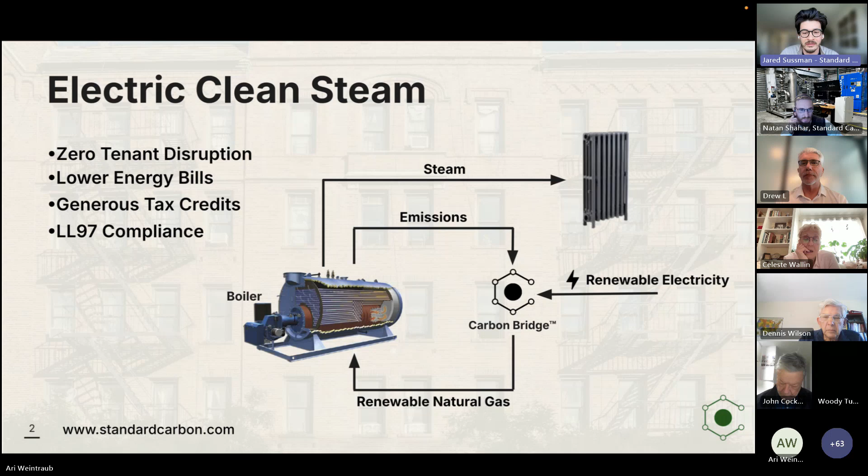An easy way to think about that is that it's similar to how houses with solar can sell electricity back to the power company on a sunny day. You can see this is a totally closed loop system with our only input really being grid electricity. This allows you to use your existing steam system and comply with Local Law 97 with no tenant disruption. Next slide, please, Ari.

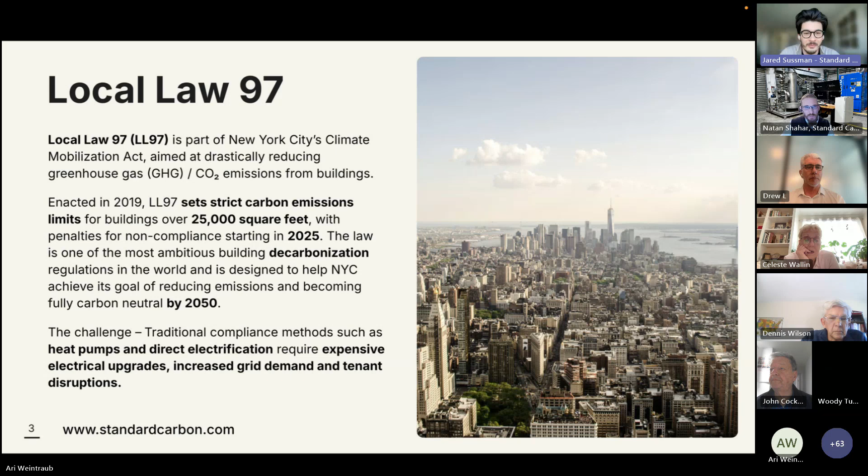I know you're all familiar with Local Law 97 at some level. The end goal is for New York City to become decarbonized, meaning fully carbon neutral by 2050. This is really not that far in the future, considering the amount of work that needs to be done to get there. Our take on this challenge is, how do we get this done with minimal tenant disruption? So what can we do about this enormous challenge in front of us? Next slide, please.

I'm going to introduce our founder, Natan, to answer that question. Hi, thank you. My name is Natan. I am a New York licensed professional engineer. I've been working in the energy efficiency space now for more than 15 years, providing LL87 compliance, NYSERDA rebates, now LL97 compliance, a whole host of work for the real estate sector in New York City in particular.

I started Standard Carbon in 2019 when the law was first passed, Local Law 97, because a lot of my clients came to me and they said, what do we do about 97? And I said to them at the time, well, if they really do go through with this law, you should sell your buildings. That's what you should do, because it's going to be so difficult potentially to retrofit and electrify your boiler plants and everything else that you might want to just exit the market entirely.

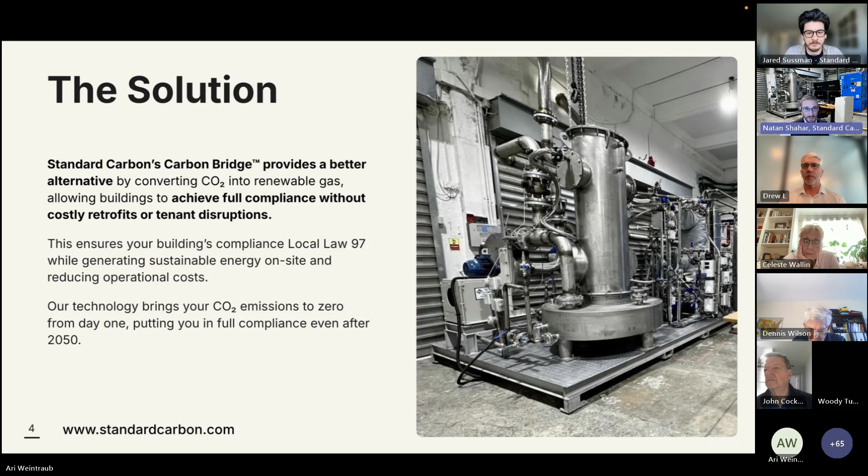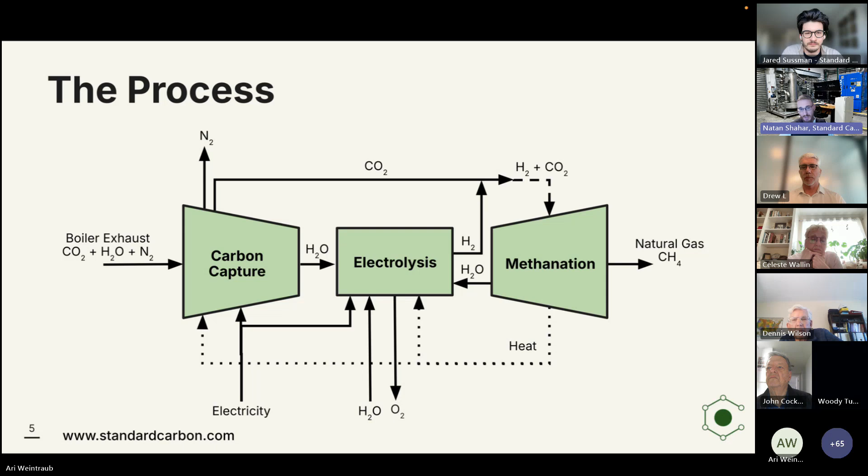Only this natural gas, instead of being fossil fuels, it's produced from that carbon dioxide and intermittent renewable electricity, which you see entering sort of the magic box, so to speak, from the bottom. That's in a nutshell what we do, and it offers a solution for electrification that we're very excited about. So next slide.

Thank you, Natan, by the way. Let's move on and cover some of the key benefits of the Carbon Bridge system. We already said a few times that our system causes no tenant disruption. What we really mean by this is that all the work is done in the common areas and practically doesn't even touch your existing steam system.

Something I've personally heard a lot in speaking with numerous building owners is the challenge, like Natan mentioned, with not having too much space to work with in their basements or on their roofs. Like he said, we've designed this Carbon Bridge system to be flexible and enables us to fit into practically any space, as well as work with buildings of any size, small and large.

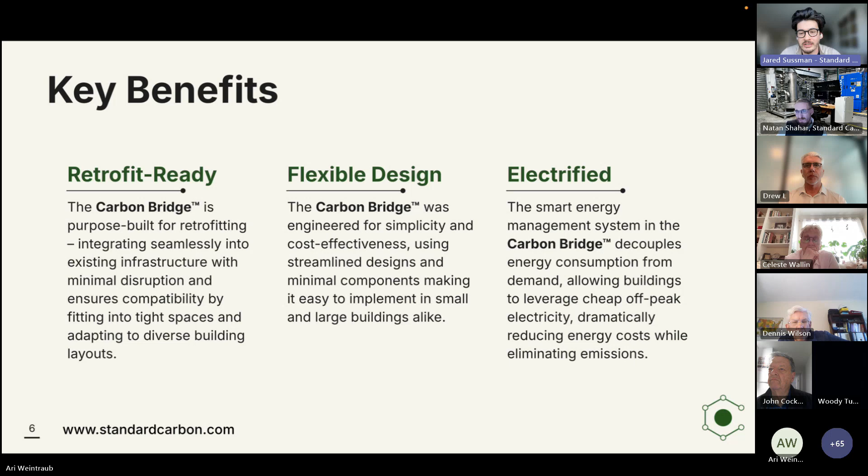The last one on here, we'll dig into this a bit more on one of the next slides, but because we use off-peak electricity to power our system, buildings can see significant energy cost savings since they no longer need to be at the mercy of peak demand charges. Next slide, please.

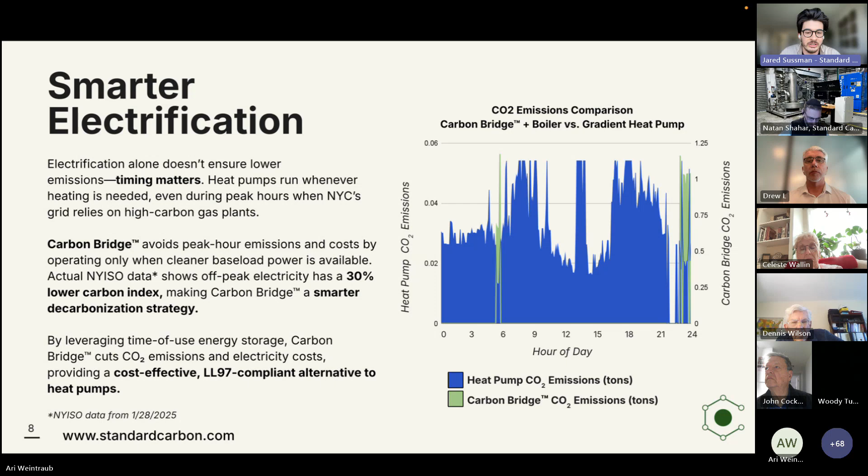Okay, so let's talk numbers. Take a typical 50,000 square foot building in New York City. If it exceeds LL97 limits, it could face $250,000 in annual fines. This is a rough estimate based on typical emissions data for older, mid to large commercial buildings in New York City. Carbon Bridge eliminates those fines, and by converting emissions into renewable energy, it also offsets the utility expenses.

This makes it a highly cost-effective solution with a typical payback period of just 5 to 7 years. Now, this 5 to 7 year payback period doesn't take into account the avoided penalties. Obviously, if you factor that in, it's even more financially attractive, and we see a payback period in this case of just under 3 years.

Next slide, please, Ari. On the subject of fines, I'd like to introduce our CEO, Drew, to talk about how we can help immediately. Thanks, Jared. Hi, everyone, and thank you for your time today. I feel this is such an important slide, I wanted to present this myself.

Being a member of condo boards for years, I know firsthand all the issues we all face, right? I see the rising costs, code compliance, regular maintenance, along with a host of other issues. And I, like you, feel the frustration while simultaneously realizing the importance of addressing this all. I coined this Local Law 97 derangement syndrome. And it is a reality for us all.

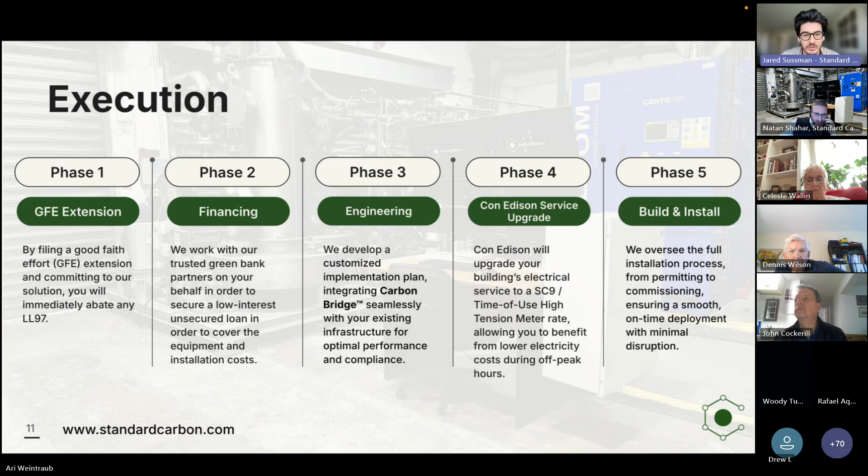When it comes to installation, we oversee the entire process from permitting to final commissioning. Our team ensures that everything runs smoothly and with minimal disruption to your daily operations.

Next slide, please, Ari. I just want to say again, thank you for joining us today. I hope the session gave you a clear understanding of how the Carbon Bridge can help you achieve Local Law 97 compliance while unlocking significant cost savings.

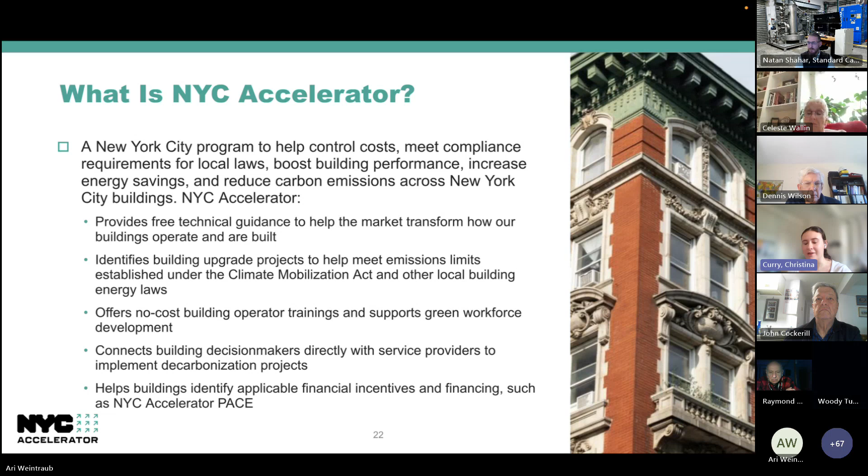So I'll be talking a little bit about what the Accelerator as a program can offer, and specifically Local Law 97 deadlines and extensions today. Next one. So the Accelerator is a program through the New York City Mayor's Office of Climate and Environmental Justice. We exist as a free technical guidance resource program to help walk you through local law compliance, any other building energy upgrades you'd like to make, connect you with incentives and service providers, and hold your hand through the process from beginning to end. And if financing is necessary, or you have a super that wants to get some sort of training, we also offer resources on that side as well.

And then the details of what buildings we're eligible to work with. We are able to work with any privately owned building over 5,000 square feet. So if you own smaller buildings that are not subject to Local Law 97, we can work with you as well if you're interested in making upgrades. Any building smaller than that, we refer to our partner organization, so you're not left in the dust. All you have to do to get connected is give us a call, and you'll get connected with an account manager like myself, and we give you objective advice tailored to your needs and goals for your building. And it's a completely free program, so there's no cost. You can talk to us as many or as few times as you'd like.

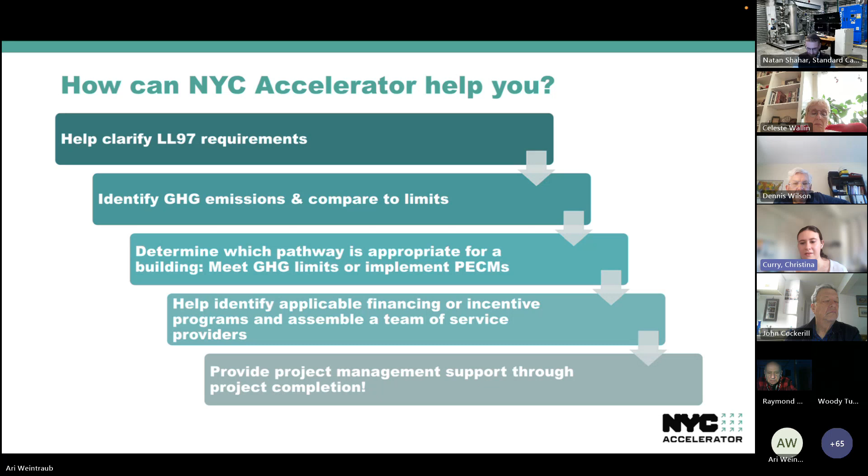And this is our regular process for a Local Law 97 covered building. We clarify what exactly the requirements are and what the law is expecting of your building specifically, identify what your emissions are based on Local Law 84 reports and compare them to the limits, and determine which pathway is appropriate for your building. I'll get a little more into what this means in a couple of slides, but then we help identify how exactly you can achieve those goals, and like I said, hold your hand through the process until the projects are completed.

Fun part. Okay, so Local Law 97 timeline. It was passed back in 2019, and now we are almost at the first compliance report deadline of May 1st, 2025. That's the big one there. Coming up very soon, as you can see, Article 321 and Article 320. That's affordable housing under certain criteria, as well as market rate multifamily, and commercial and industrial buildings. Every 5 years will be a new compliance period with a new threshold. So I'll explain that as well.

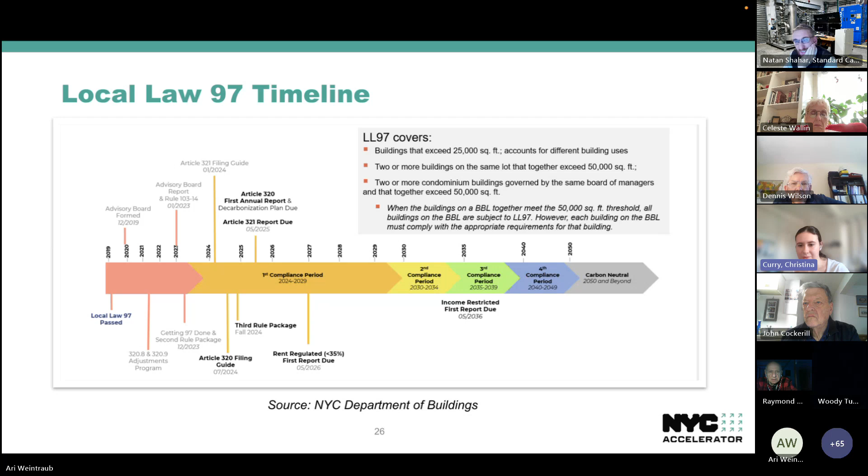So the overview, as I mentioned: Article 320 applies to market rate buildings and commercial industrial buildings over 25,000 square feet, and they will be required to meet these carbon reduction targets.

Every 5 years, this given threshold, based on the building use and building size, catered to each building, will drop based on these goals to eventually hit net zero by 2050, as was just discussed.

As things currently stand, 89% of properties are expected to meet the first compliance period limits, which is great. The big drop comes in 2030, when only 63% of properties are expected to meet those limits. So planning ahead is really key.

It's truly not that far off, so planning ahead is a great idea. A decarb plan, that kind of thing, is really a good idea at this point.

For Article 321, that refers to specific affordable housing buildings, again over 25,000 square feet. That has a different compliance option, which is a one-time report. So stay tuned if you fall under the Article 321 pathway specifically.

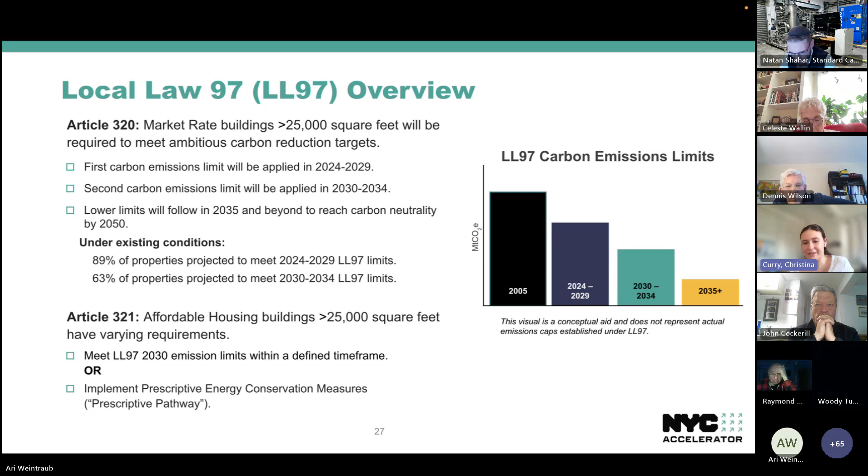With the GHG emissions compliance pathway, the Article 320 traditional way, the gross floor area is very important - that's what determines your limits in a lot of cases.

Starting in 2025, annually on May 1st, along with your benchmarking, a Local Law 97 report will also be due, certified by a registered design professional - a professional engineer or registered architect in the state of New York.

If you exceed those limits at all, there's a $268 per ton CO2 fine over the limit, and you have to pay that each year until you are compliant. Once you're below the threshold, there are no penalties. But if you're above, there is this pretty hefty fine.

The exception applies to Article 321 buildings that I just mentioned - this is just another way of phrasing that. That includes buildings with more than 35% rent regulated units. So if you fall into that category, disregard most of this.

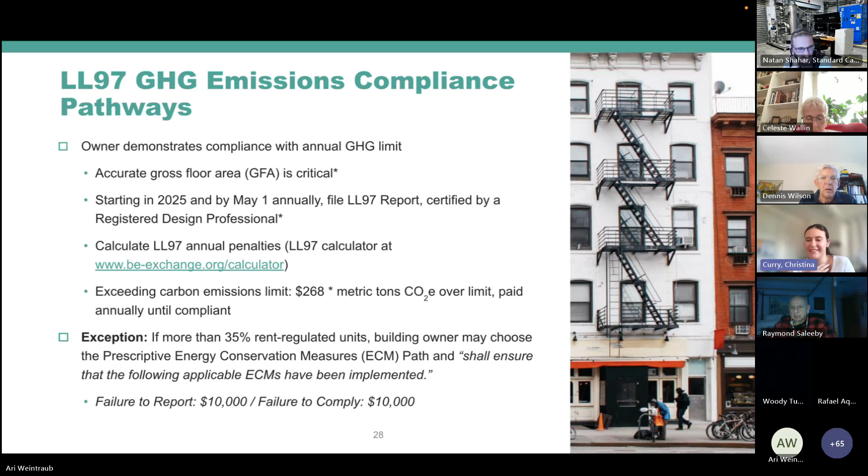Penalties for noncompliance differ between the affordable housing category and the market rate category. For Article 320, there's a 2-prong penalty: if you do not submit the report, there's a monthly fine of 50 cents per square foot.

So even if you are above the threshold, definitely submit your report - that's a separate penalty altogether. If you are above the threshold, there's again that $268 per ton over, fined annually. That'll vary year to year, but even if you're over the emissions limit, filing a report is still very important.

Article 321 has a flat penalty fee, but again the same 2-pronged system of no report and not in compliance. So even if you are not in compliance, consider the penalties of not submitting a report at all - that's a whole separate penalty.

And then Local Law 88 - this is not the same as Local Law 97, but it's related. It's a law related to lighting and submetering that is also due May 1st, 2025, and it applies to the same collection of buildings over 25,000 square feet.

How this law works: if there are any non-residential tenant spaces over 5,000 square feet in any multifamily buildings, or the entirety of C&I buildings, the lighting would need to be submetered for each tenant, and lighting upgrades would need to be in place for all common areas and the C&I building.

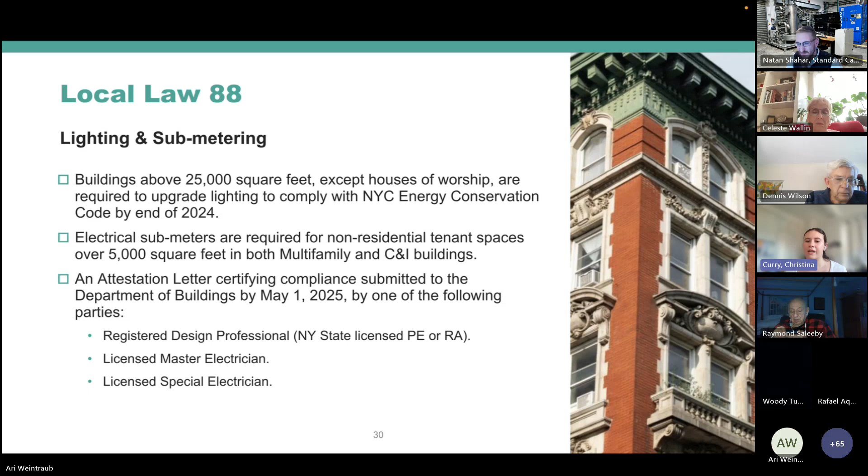An attestation letter for this will need to be submitted to the Department of Buildings, again by May 1st, 2025, by either a registered design professional who would be doing your Local Law 97, or a licensed master electrician or licensed special electrician. That's something else to keep in mind.

For Local Law 88, it's phrased interestingly: if you've made lighting upgrades since July 1st, 2010, the lighting has to meet the code that was in place at the time it was installed. So if you installed your lighting in 2012, it would need to meet the 2010 code, and if you have paperwork to prove that, you shouldn't have to make any upgrades if it met the code. But if you're making any upgrades today, it would need to meet the 2020 Energy Conservation Code.

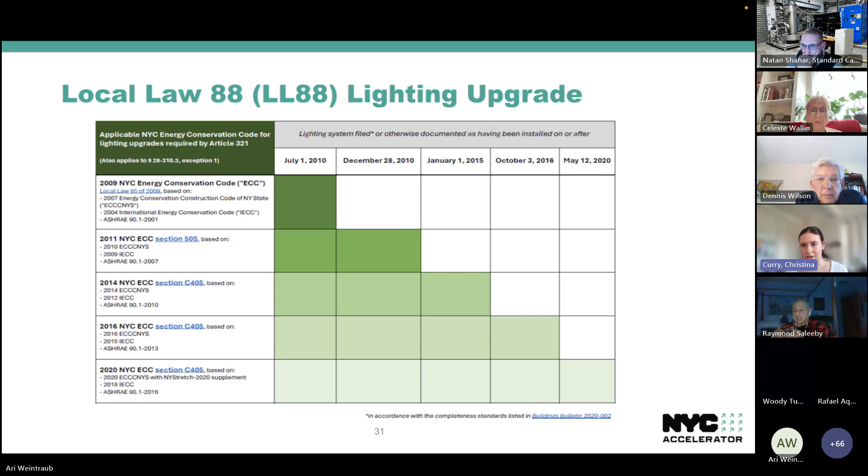And then the good faith effort, which the prior presenter talked about a little bit. Essentially, the good faith effort works to show that you have a plan and you're doing your best, which delays those fines for current years. So there are two main things here: either there's an unexpected or unforeseeable event, like if the building had a fire or a flood - that's one bank of this. The other bank is the good faith effort document.

This is important because it does require compliance with all the other local laws. So you will need to submit your emissions report, which is like Local Law 97. That needs to be satisfied, as does benchmarking, which is also Local Law 84, but the emissions report will also need to be submitted separately - your RDP work with that with you. And then Local Law 88 will also need to be satisfied, which is why I just talked about it.

So completing all of those and one of these six things - there's details for all of these, but the most common of which is the decarb plan.

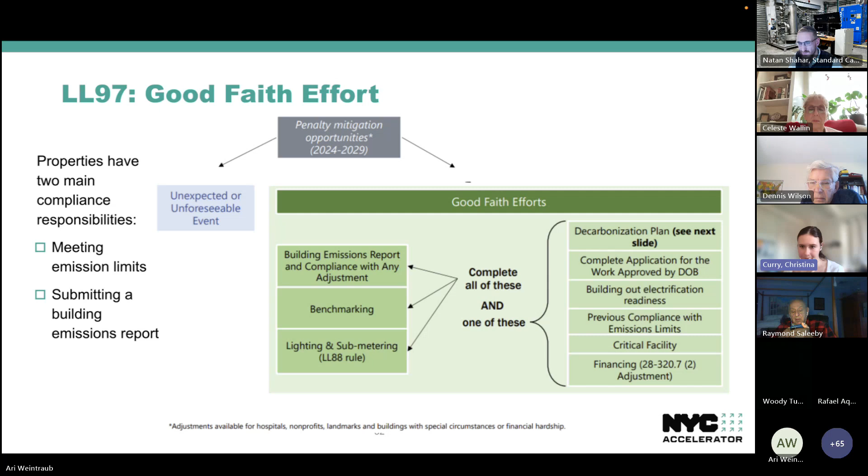So the decarb plan essentially lays out your next 25 years for reaching net zero carbon emissions by 2050. You have to have an energy audit, similar to what Local Law 87 requires if your building is subject to that, an inventory of all the major equipment, any alterations that would be needed for compliance. So you need to have the timeline of installations, the financing plan for such upgrades, and the expected emissions reductions for each of those. This is a very big long-term plan.

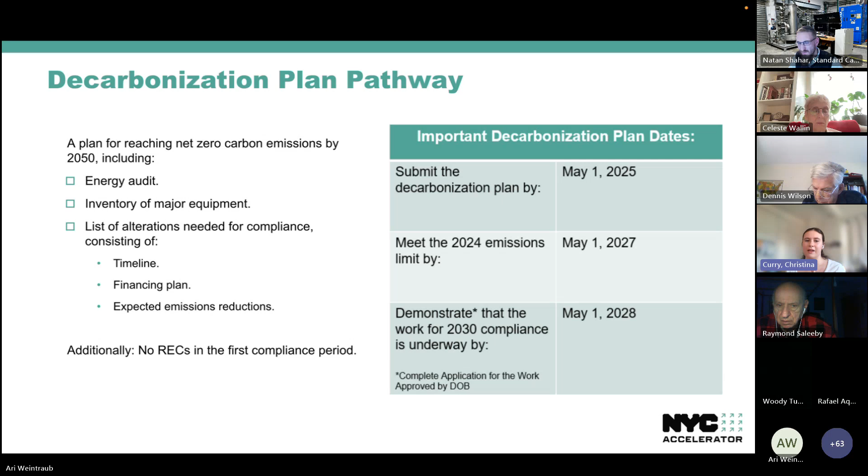It would need to be submitted by May 1st of this year. You would need to be able to meet the 2024 limits by May 1st of 2027, and you would need to demonstrate that the work for 2030 compliance is underway by May 1st of 2028. So this kind of delays it now, but make sure you're hightailing doing this work in the next couple of years.

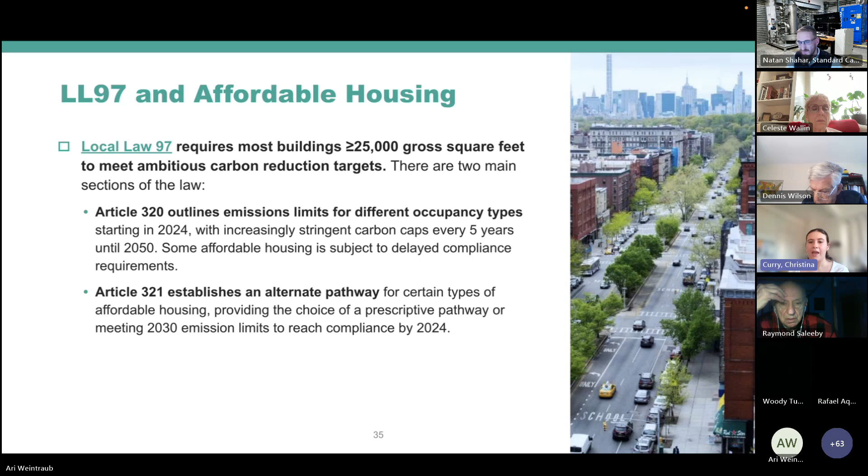And then affordable housing - again, buildings over 25,000 square feet. Affordable housing is interesting because some fall under Article 320, some fall under Article 321. A big piece here is what exactly makes your building affordable - whether it's the number of rent regulated units or tax credit, you fall under different pathways. That's part of what we're here for, is to help you figure it out, and your RDP would also be confirming that as well.

So this splits up what they are. Article 321 is the one that has a completely different situation going on, due May 1st, 2025. Article 321 applies if 35% of the units are subject to rent regulation or more, HDFC co-ops, or one or more units that participate in a federal project-based housing program, or if the building participates in NYCHA Pact. If you fall under those categories, you'd be expected to comply under Article 321, which is a one-time report, either demonstrating that you're below the 2030 limits as of today, so that after that big dip, that you're under that today, or that you complete the 13 prescriptive energy measures based on your system.

These would be the 13 PECMs if you fall into that category. The other two are pretty much the same as what I just explained, but with a bit of a delay - if you don't fall under this, you're kind of in the same boat, you just have a couple more years to comply. But for Article 321, there are 13 PECMs based on your system. None of them are terribly invasive or expensive, and there are incentives to help with this if you are interested in pursuing incentives.

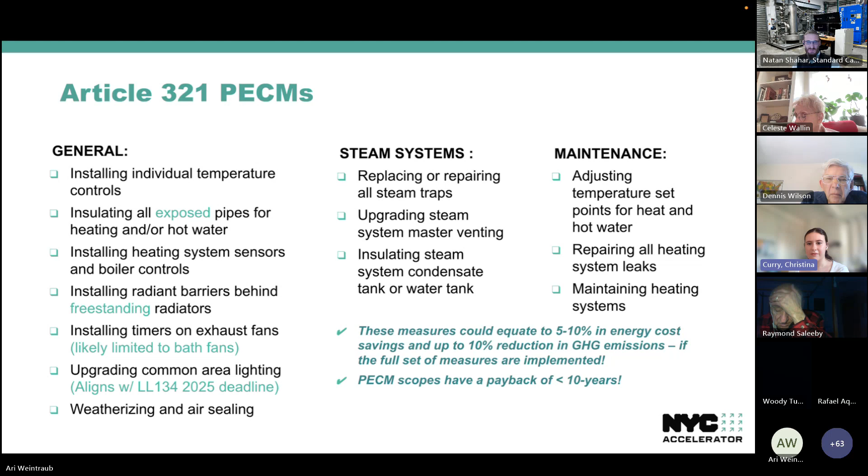And then penalty mitigation for Article 321 is a little different. There's still the unexpected or unforeseen event - nobody likes those. Then there's the eligible energy conservation project, specifically if you have received funding from some sort of government entity or agency, probably HPD. So if you own an affordable multifamily building and you have recently worked with HPD on financing, this is something to look into, but you would probably know, or HPD will be in contact with you if you fall under this category.

And the final one is the mediated resolution. Essentially that's entering a contract with the city that you will either complete the prescriptive energy measures by December 31st, 2025 - so it just gets you a little extra time, and you have to have that full-fledged plan, not as much as a decarb plan, but you have to have the contractor who's doing it, how you plan to pay for it, and that timeline for the next, at this point, 10 months.

The other option there is what's called 2030 by 2030. So essentially, again, you plan out until 2030 how you will achieve being below the 2030 threshold by 2030. So you plan out the next 5.5 years for that.

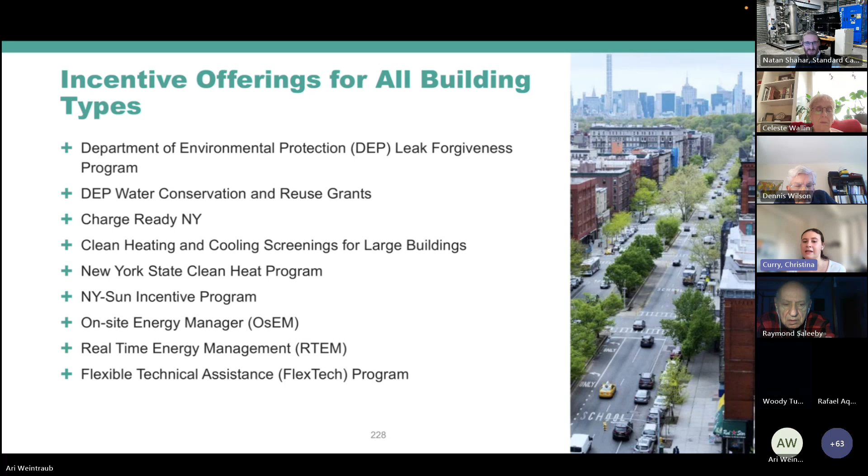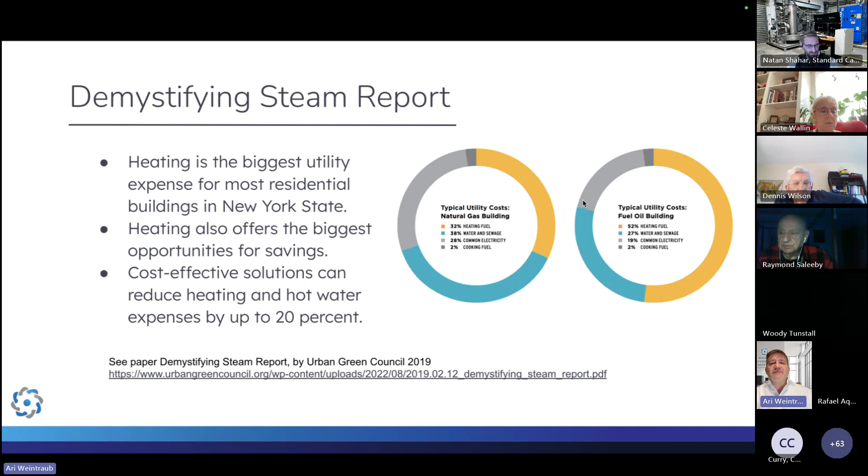So when we approach a building, we're doing a lot of Local Law 97 work, but we also do a lot of general maintenance on buildings with maintenance contracts and so on. We encounter a lot of common issues that you probably have with your steam systems - varying hot and cold apartments, tenants opening the windows in the winter because the units are being overheated. So that's literally energy going out the window.

Clanging and hissing pipes - that's because a lot of times the pipes, over the years, aren't pitched exactly right. That creates hammer in the pipes, leaky radiators, high energy costs, and tenant complaints.

And a lot of these solutions, or pretty much all the solutions, are highlighted in those 13 measures that Christina was showing before, which is master venting, TRVs and orifice plates. We'll talk a little more about orifice plates in a moment, because that's been something we've been doing a lot of, which has great benefits for maintenance costs and energy costs for buildings.

Steam trap repair - those steam traps typically fail every 3 to 5 years and need to be repaired or replaced. Multi-sensor boiler controls - so now one of the 13 measures is not only having a boiler management system, boiler controls, but also having in-unit sensors that feed the boiler to let it know how to regulate the firing on and off. Pipe insulation, boiler clean and tune, and steam system general infrastructure.

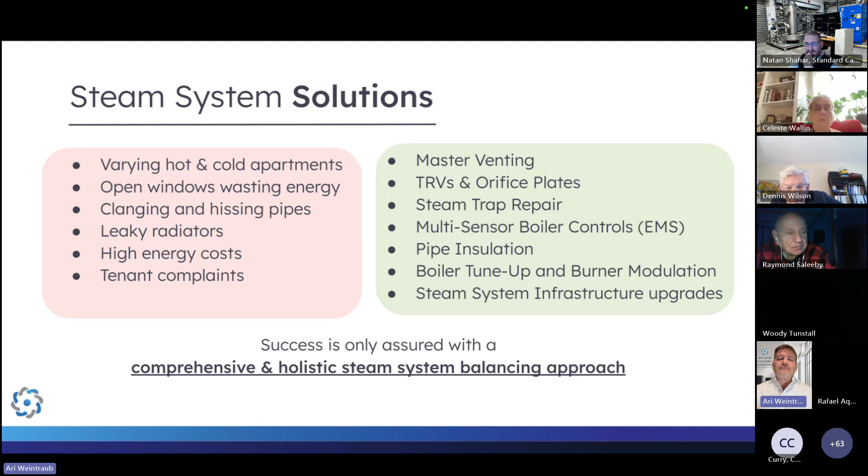Success is really only assured with a building when you take a comprehensive and holistic approach to steam system balancing. We mentioned steam traps - they're again failing about every 3 to 5 years. TRVs are required in the 13 measures for two-pipe steam system buildings. However, unless there are heating complaints in a one-pipe system building, they are not required. The energy savings are just higher in a two-pipe steam system building generally.

Pipe insulation, of course. Orifice plates are engineered discs installed in the radiator inlet. Initially, when steam systems were really engineered, they were engineered for overheating - it goes back to the Spanish flu about 100 years ago, and at that time it was actually recommended to overheat the room and then open the window. Of course that's changed, but what hasn't changed is the power, or the capacity, of the steam.

So what happens is that apartments are frequently overheated, and orifice plates regulate the amount of steam entering the radiator so that it prevents overheating, and the correct amount of heat is entering the radiator or the apartment. What this also does is eliminate the need for that costly steam trap repair.

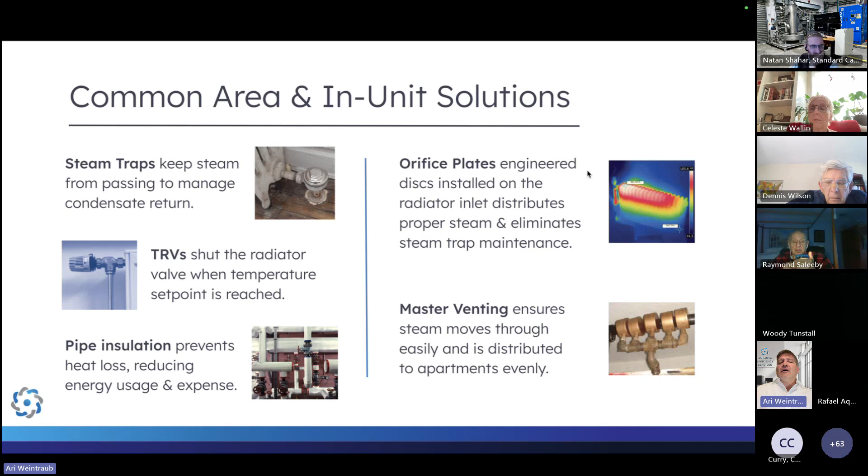So every 3 to 5 years, every unit needs to be accessed, common areas as well, to replace or repair those steam traps. By installing orifice plates, the steam is not hitting up against that steam trap, and it eliminates a huge maintenance cost. Master venting is on the steam lines in the boiler room, and allows steam to move through the system efficiently and easily.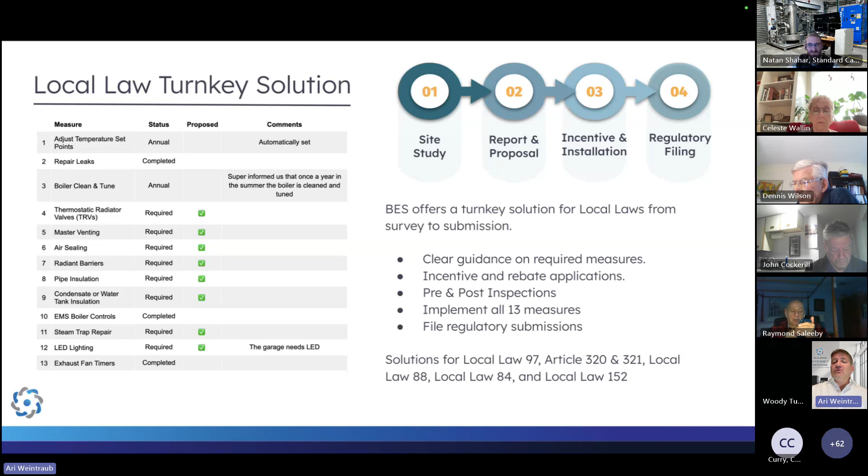Before the work is completed, we will help them navigate and apply for any incentive applications or programs that they are eligible for. That would include the engineering, the calculations, pre-inspection, and help the building carry the cost of the incentives. We'll then go ahead and do the installation work, and then, of course, the regulatory filing. We help buildings with Local Law 97, both Article 320 and 321, Local Law 88, 84, and increasingly now, Local Law 152, which we'll talk about a bit more in a moment.

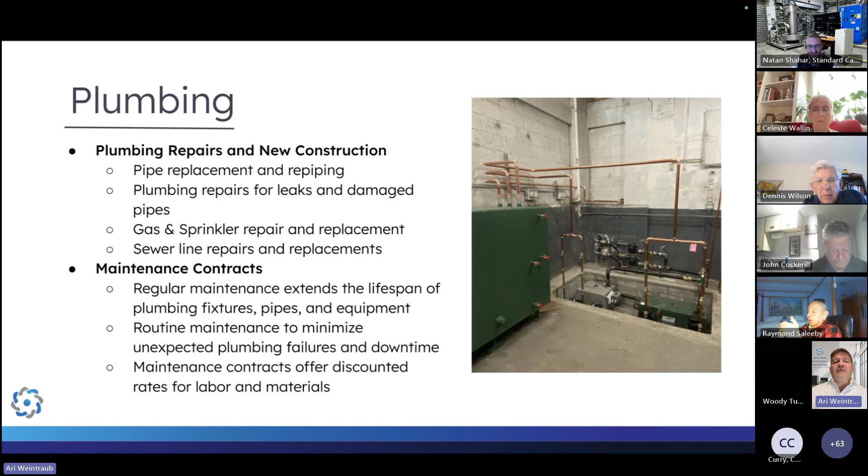About a year and a half ago, BES launched a dedicated plumbing division, and this division of ours does both plumbing repairs and new construction, piping replacement, sprinkler repair and replacement, sewer line repair and replacement, and we also do maintenance contracts for buildings that need regular maintenance, and will work with tenants in the building directly and take care of any heating issues.

And one thing that our plumbing department now has been very busy with is Local Law 152. This requires all buildings in New York City with a natural gas connection to have their gas lines inspected every 4 years. There is a $10,000 fine for non-compliance. We have a master plumber on our team that runs our plumbing division. We can help correct violations, inspections, and handle all the paperwork.

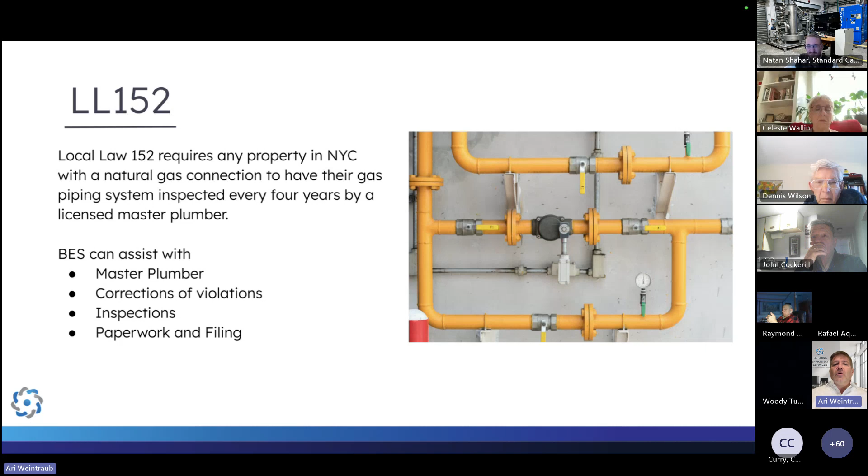A little bit unrelated, but this is something that I worked on with Christina recently, and I thought I should bring it to your attention. We've been working with a number of buildings that were showing correctly on the 2024 Article 321 list, and implementing the measures. However, about a month ago, the DOB published a new list of Article 321 buildings, and some of those buildings that were showing correctly as 321 in 2024 are now on the 320 list, which means that they wouldn't be eligible for the affordable pathway.

And we've reached out to the DOB. Their response to us was that they're going to investigate our inquiry. But what you should make sure is you have your 2024 DHCR annual registration summary handy if you are an affordable building, and your rent roll report, so that when we do help you file for Article 321, we will be able to submit proof that you are correctly identifying as an Article 321 building.

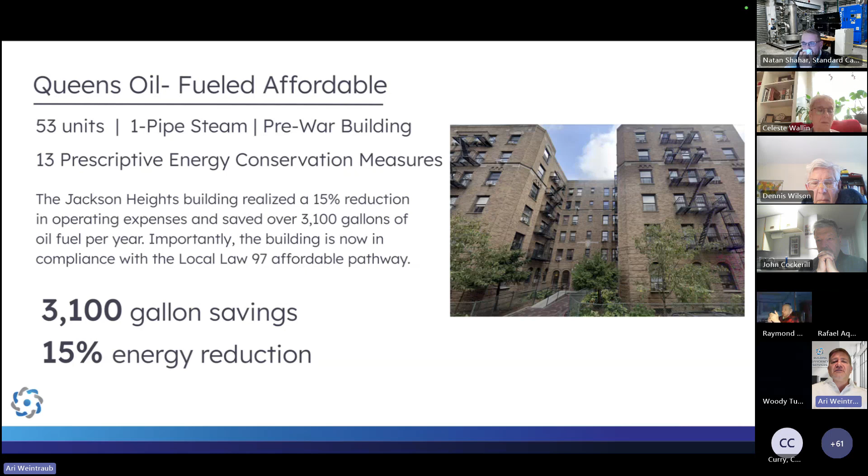We'll talk about a couple of case studies briefly before we move on to the Q&A. So here's a Queens oil-fueled affordable building that we helped, 53 units, a one-pipe steam pre-war building. They implemented the 13 prescriptive energy conservation measures. With oil-fueled buildings, there aren't as many energy rebates and incentives available, so we help try to reduce out-of-pocket costs as much as possible. And there was a 15% energy reduction for this particular building, over 3,000 gallons of oil saved.

And we're also just wrapping up now NYCHA Patterson, New York City Housing Authority, Patterson Houses. This is a 15-building project, almost 1,800 units. These units are on a two-pipe steam system. And in this particular project, they installed the orifice plates we discussed earlier, eliminating the need for future steam trap repair and replacement. We also did all the steam traps in the common areas. The top floor of a building with orifice plates will still keep its steam traps, so we repaired and replaced those as well. This project is estimated to have an 18% energy reduction.

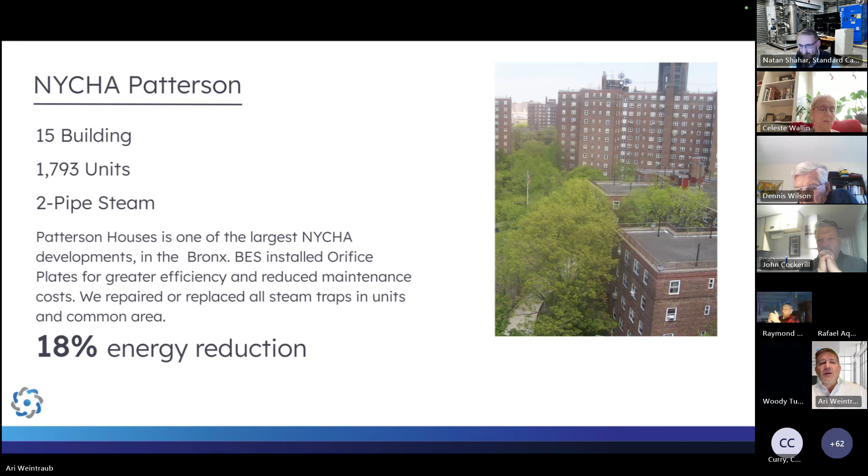So I want to now open it up for a Q&A session.